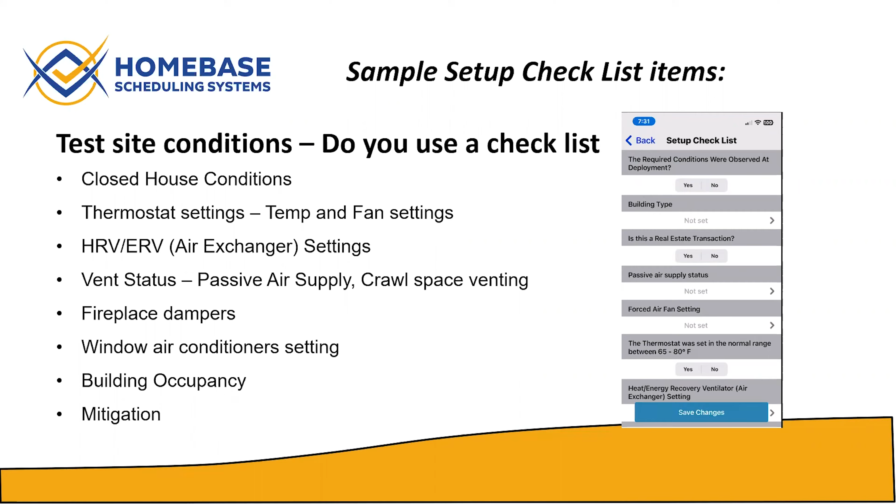Now, another item probably not paid attention to much in testing, especially in unregulated states—at least in Minnesota this was almost never done. If you're looking at a house where the foundation footprint exceeds 2,000 square feet, you should be considering multiple test locations within that home. We know radon levels can change quite a bit from one end of a house to another, and the larger they are, the more opportunity there is for that to happen.

You should also consider a second or even a third monitor for each area of the home served by a different heating or cooling system. One area with a forced air system, where the air is moving around more and evening out radon levels, maybe even doing some ventilation in the process, might be lower than an area serviced by electric baseboard heat, for example.

Minnesota doesn't just recommend, they require us to test different foundation types. Maybe you have a split entry house or a 3-level split, where you might place one monitor in the basement, one on a slab, maybe a third over a crawl space, and a fourth over another slab. So it's not uncommon to have 3 monitors, and even once in a while we're doing 4 or 5 monitors in a home. That has a huge impact on your radon testing operation, doesn't it?

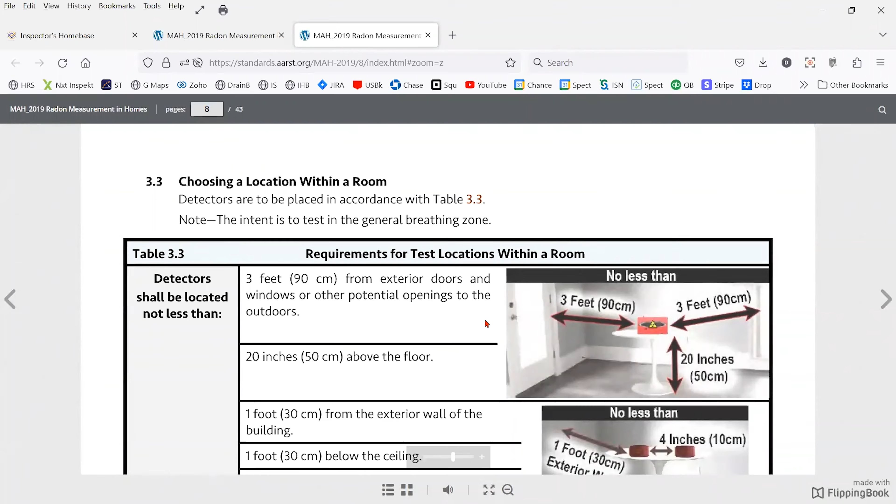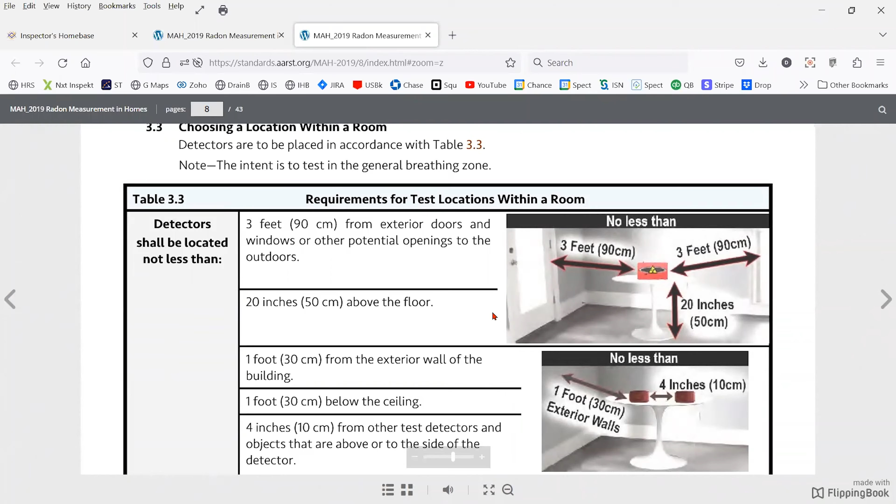Some of us use 5-gallon pails - do they measure 20 inches? I'm not sure, a lot of them don't. We use tripods, so we always know we're exactly at the same height. And 1 foot from an exterior wall of the building.

And one foot below the ceiling. Well, with CRMs, we're not going to hang that thing from the ceiling probably. And then the last one, 4 inches from other test detectors and objects that are above or to the side of the detector.

I've been challenged a couple times about having a monitor too close to an interior wall. Well, we only need to be 4 inches away from an interior wall, according to this, not 12 inches.

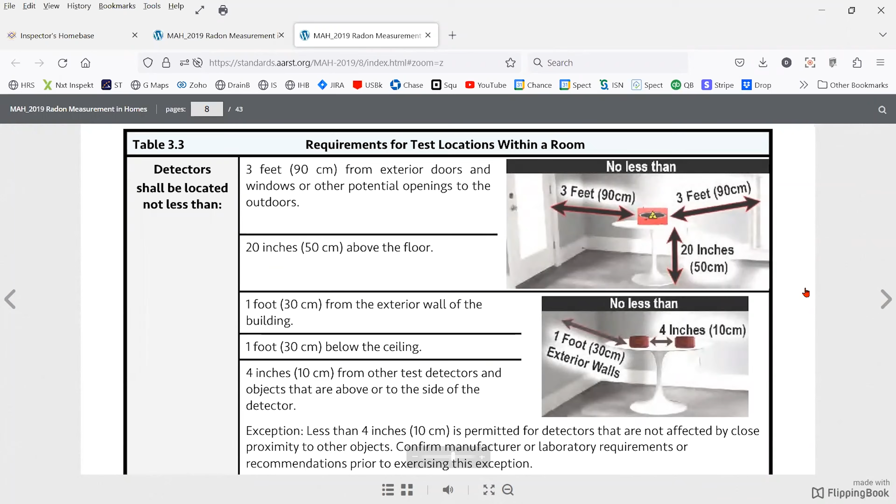And for your duplicate tests, your monitors must be placed more than 4 inches apart, but less than 8 inches apart. So it's kind of sensitive where you place those. You want to make sure you get that right. If they're more than 8 inches apart, you still have a valid test there, but you don't have a valid duplicate test. You just have 2 readings.

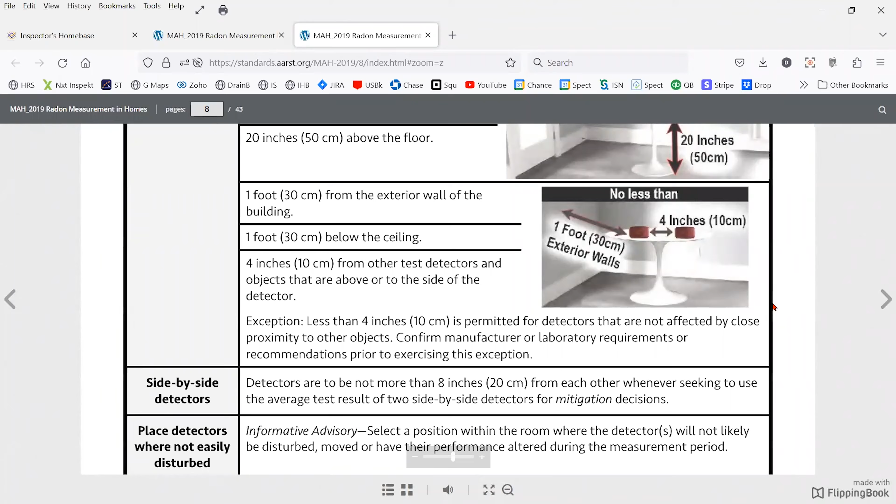Here they talk more about where not to place these. These seem pretty obvious to most of us, but if you've been in the business at all, you've seen pretty much probably all of these done by other companies. Inside closets, cabinets, sumps, crawl spaces, nooks, or near heat sources. These are pretty obvious ones. Maybe the sunlight might catch you sometime if you don't want the sun to be shining on that monitor.

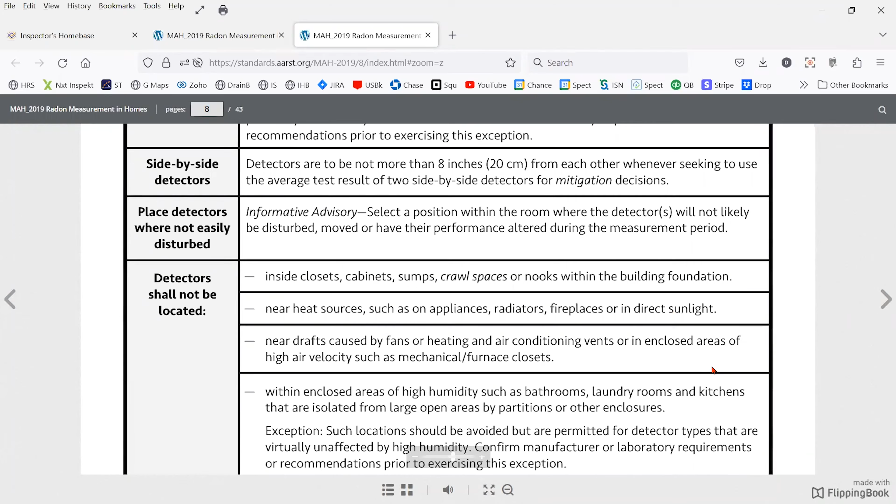And of course, away from drafts caused by fans or heating and air conditioning vents. Sometimes that is hard because you've done everything you can to get this monitor in a place where it's not in people's way, away from the window, away from the outside wall, all that. And then you're keeping it away from the kids. And now there's a heat register or a supply register right above you, and you're going, oh man. So what do you do? In some cases, you're going to have to find another place, or maybe you can divert that airflow somehow by taping some paper over the vent register or closing the vent register partially. You don't want to close it all the way though, it will impact the test.

And avoid placing detectors on or near objects that may produce radiation. Basically, we're talking about rocks and granite tops and so on, slate pool tables.

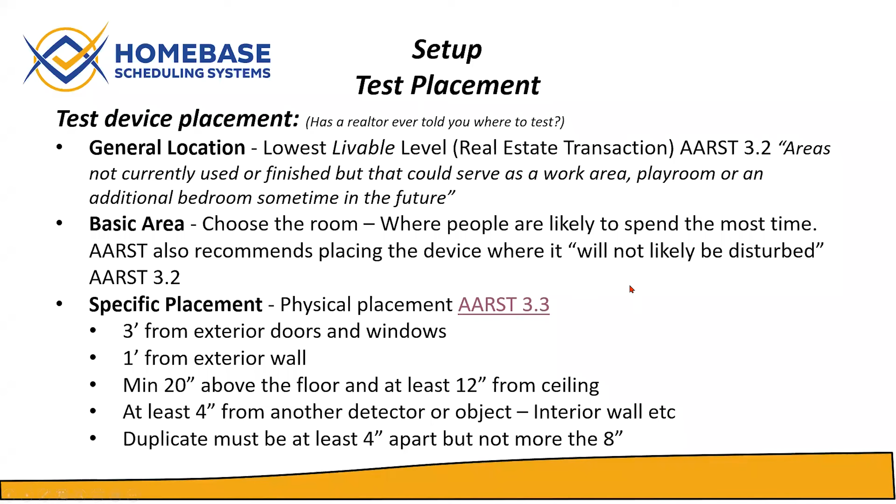We just covered that.

So you're going to give notice to the homeowner about closed house conditions. Of course, all windows need to be closed, exterior doors too, heating and cooling need to be set to 65 to 80 degrees Fahrenheit. Now that doesn't mean that the monitor is going to be in that temperature range. The temperature on the thermostat in the hallway on the main level could be 68 degrees, but it may be 55 degrees down in the basement, especially in colder climate areas.

Whole house fans, of course, those need to be off. Fireplaces, even gas fireplaces, they don't want those burned because it'll affect how much the heating or cooling system runs. I'm not in full agreement with that one, but it's the rule.

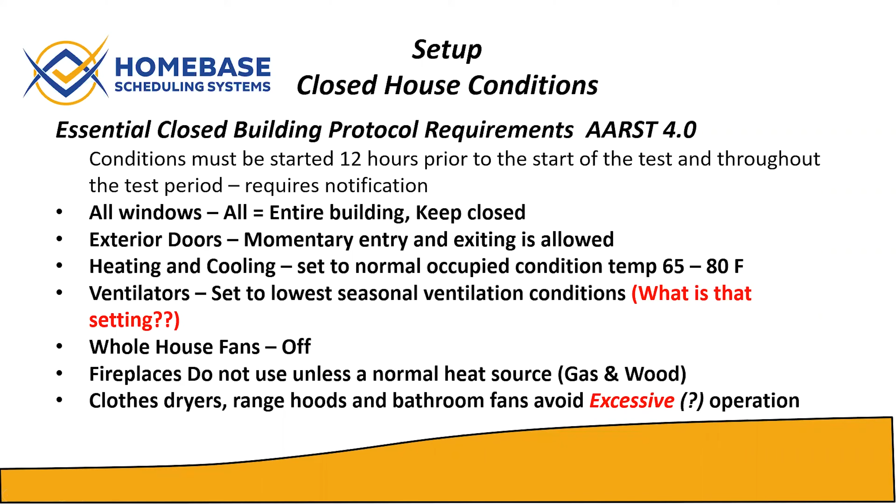When not to test - we don't want to test when we can't keep closed house conditions. Sometimes we know that by the attitude of the tenants or occupants that there's going to be a problem, they're not cooperative, they're not happy about the whole situation. Or maybe it's a time when there's construction going on, trying to get things finished up to get the house ready for sale, and you're trying to get this test done. It's just not going to work very well.

Or if there's other reasons for excessive traffic, which is very common in our real estate transactions, coming across the home where someone decides they need to move out that day. Kind of a problem.

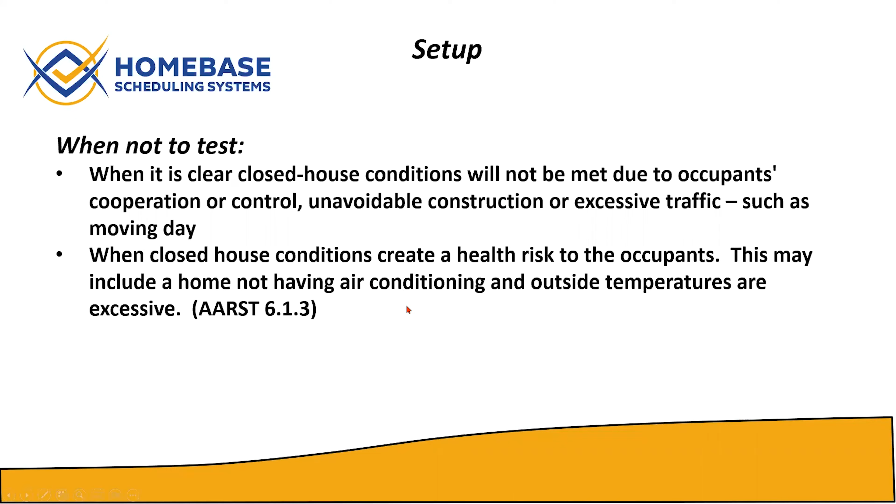When closed house conditions create a health risk to occupants, that's going to be when the home does not have air conditioning and the exterior temperatures are just unbearable to have the house closed up, and in fact could be dangerous.

Here are some circumstances when things might not be exactly what they should be, but you can still go ahead and test. You just need to note that in the report. Maybe the ventilation system isn't set right, or the furnace fan is set to on instead of auto. Some of those things aren't significant enough to not test, but they're just notable. Same way with unusual device placements and so on.

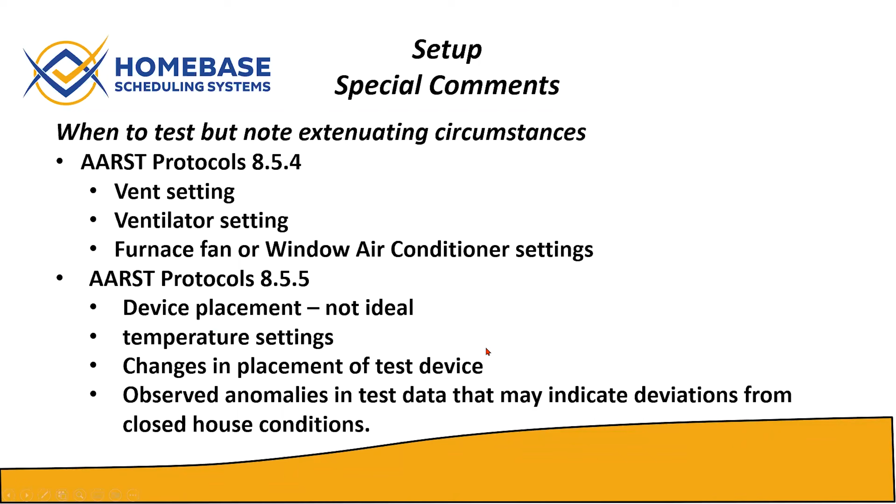Delayed start, of course, we've all been familiar with that. The biggest one, again, is doors and windows haven't been shut. You get to the house set up, the windows are wide open. The seller tells you all the windows are closed, but literally had this happen to me. I was talking to the gentleman, he told me all the windows in the house were closed. I'm looking over his shoulder and two windows were open behind him. It's really hard to, what do you say?

Sorry. But if a mitigation has been installed less than 24 hours prior, then you need to wait for that, set a delay start.

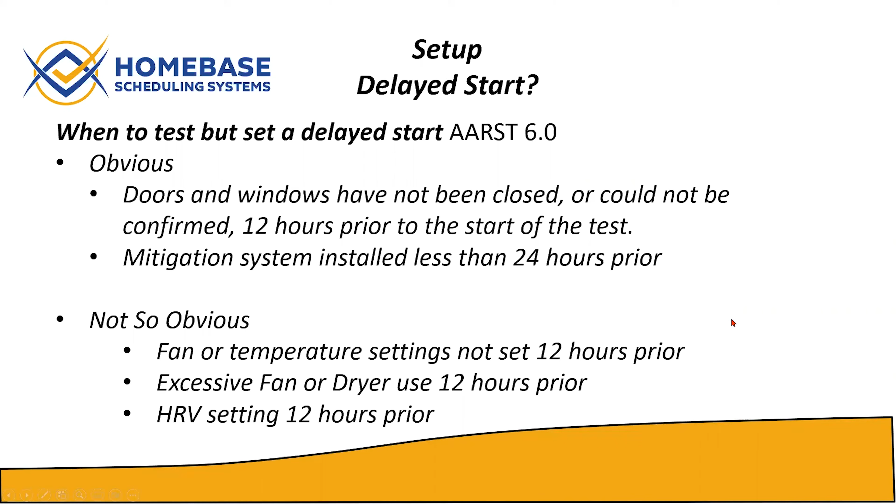The pickup checklist ties to the report requirements. So you're going to have all these questions, and basically this is the information that needs to be included on the report. These obvious ones: test location, address, make and model of machine, the results of the test, the name of the technicians. Now you might have 3 technicians' names on here: the setup person, the pickup person, and the reporting person. And you have things we've talked about that need to be in the test: HRV settings, radon mitigation type, and so on.

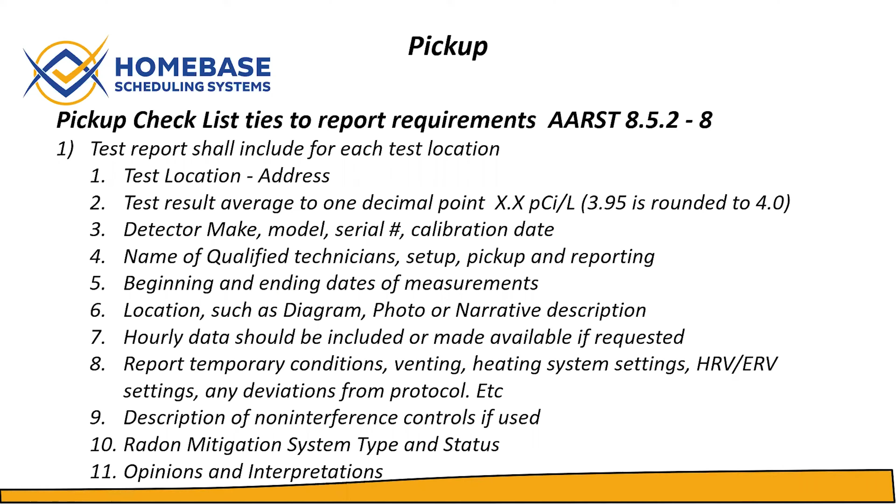Now, AARST has some paragraphs that they would like used, or you can reword these, I guess, but if the test result is this, they want a statement to this effect: fix the building if the test results indicate occupants may be exposed to radon concentrations that meet or exceed the EPA action level of 4.0, and so on. So that's kind of a paragraph. You can get that right out of the AARST document, section 8.5.9.

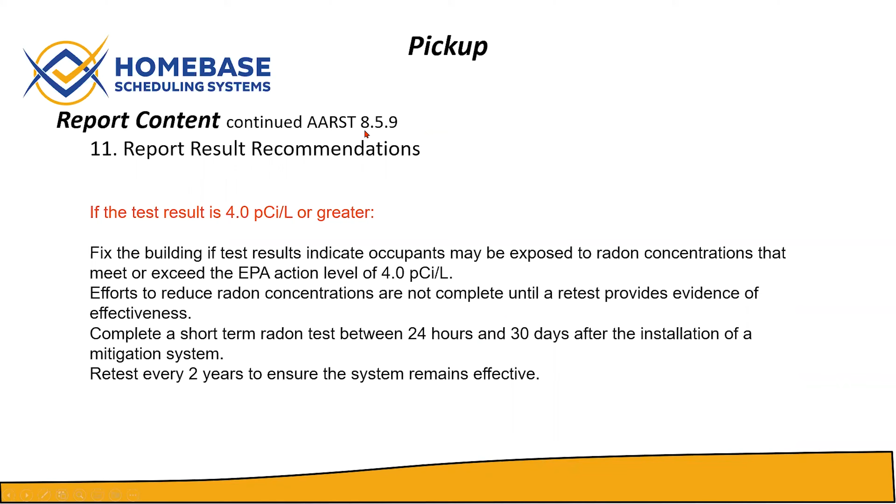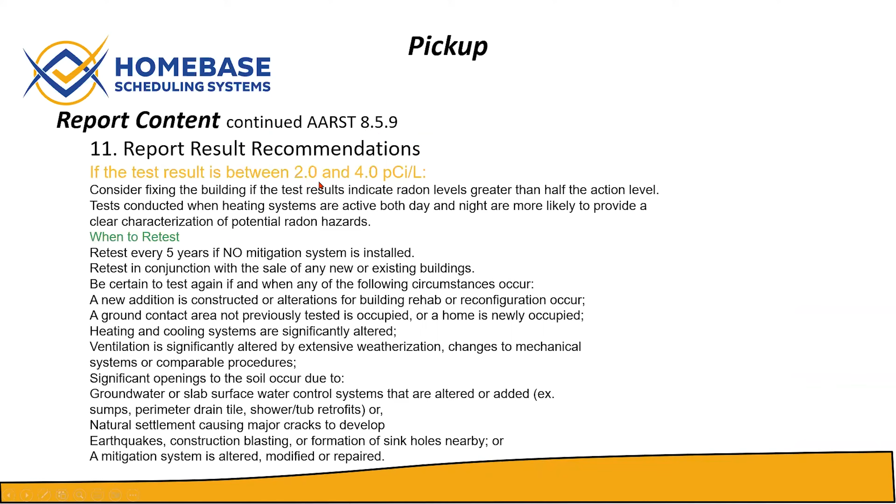And here's another paragraph about what needs to be done if the test results fall between 2 and 4. And finally, of course, if the test results are less than 2.

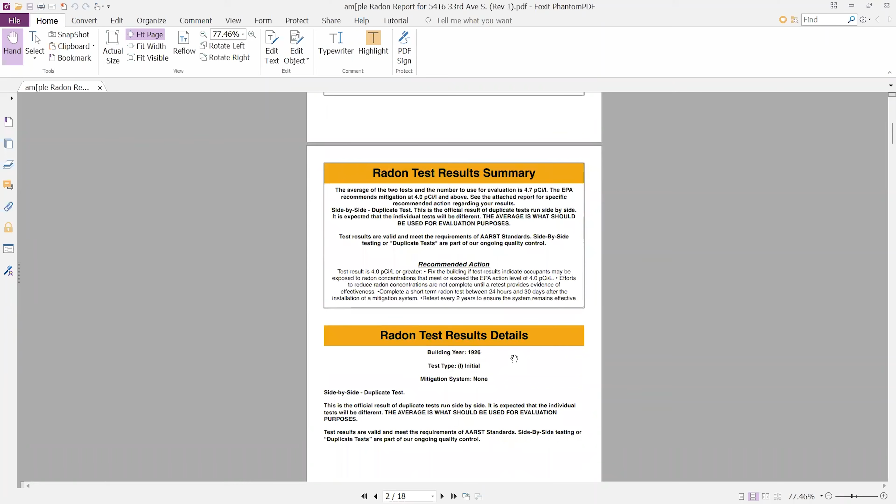But at the top of the report, there's a summary of what everybody really is interested in. Here it's talking about the average of the test being 4.7, and it's a duplicate test, which explains what that's about. And then again, the recommended action is in the paragraphs we found. Here we have a building year, test type, mitigation type, and what kind of test performed - is it a single test, duplicate test, or multiple locations?

And your first monitor with the make and model, serial number, and so on, and of course its location. A photo here helps with that location. And here is the device results, the hourly readings, and the second monitor here, and those results.

Now, all those checklist questions we were talking about are summarized here. The pickup questions are listed down this side, the setup questions are down on the left side, and the pickup questions on the right. Some of these questions only pertain to the pickup, and some only pertain to the setup, so that's why you have some blanks on one side. But the questions common to both, such as passive air supply status - was it clear in both conditions - temperature setting, was the thermostat set the same, and so on. Or a big one here is, was it occupied at setup, but vacant at pickup? That could be a cause of concern that people were moving out of the house during the test.

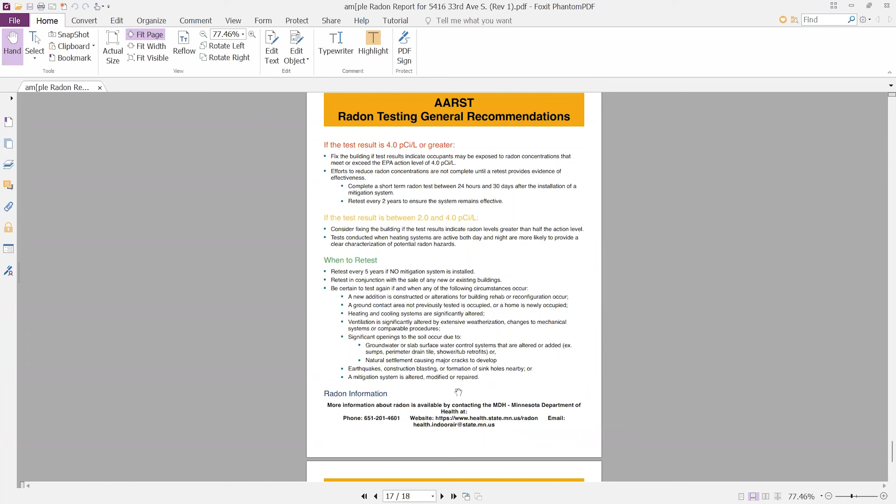And this is just a summary page, again from AARST. It lists all the different levels of radon and the actions to take. And part of that - most states are required to have their Department of Health information down here so people can contact and get more information. And of course, the testing company information, the different technicians who were involved in setup, pickup, or the report generation.

So that's what a report can look like, as you can see, if you do include the data. Now, the hourly test data is not required to be included in your report, it's just that you do have to be able to provide it to people if they ask for it. So unless you want to be answering phone calls and digging out data, you might as well include it in your report and be done with it.

So I know I've gone kind of fast, I've been talking too fast, but it's a lot of information to take in and what you need to do to keep your radon operation up to par. So how does your operation measure up with the standards?

We have a system that's a scheduling system and a calendar, and it also functions as a technician's app where they get their routes from it, they enter their data into it and generate their report. If you take a look at this calendar here, the columns are, each technician has a column for each day. You'll notice this technician has 2 columns, that's because they do 2 services.

This system does track all the ancillary services if you needed to, but today we'll talk about the radon. When the radon orders come in, they come in with a paired set of appointments, a green setup and a red pickup. That's automatic, they're tied together. You can't forget, you'll never forget your pickup.

These orders can come from multiple places. You can put a link on your website and retail clients can order directly from you. If you're working with other home inspectors, you can give them a login and they can place orders online and their orders just pop up here, it saves you a lot of work. Otherwise, if you're using ISN, Spectora, or Next Inspect, you can integrate that, and these orders will automatically pop up here for the services you choose.